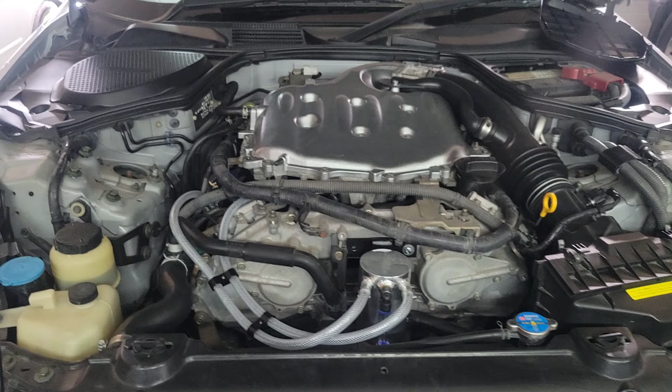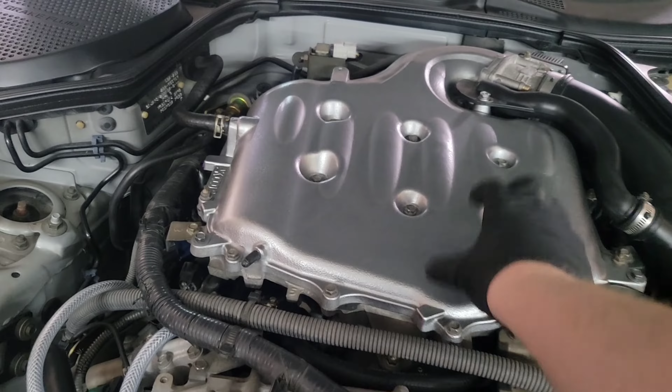All right, so I'm going to take the top manifold off and insert the GKtech spacer. What that's going to do is increase the volume here, but most importantly, it's going to allow these two front cylinders to breathe nicer by increasing the air. I'm pretty sure that's the big gain from this, because obviously there's way more volume for the rear two cylinders than the front two.

But one thing I've learned with these is that the throttle body is very finicky. So every time I work on this, hopefully it's the last time I have to take that thing off, I disconnect the negative terminal. Basically anything I have to unplug, I'll take the negative terminal off for the Nissans, because you have to do a big song and dance to calibrate that thing again. I think mine's out, but not by much.

Runs and drives perfectly fine, so I want to leave it that way at the bare minimum. All right, so I've made it this far. Be aware that at the bottom of my intake there's a hose attached to it, which I didn't know last time, and I was yanking on it, so just be careful with that. I'm just going to take the top manifold off, top plenum rather, and see how I've seen people do it.

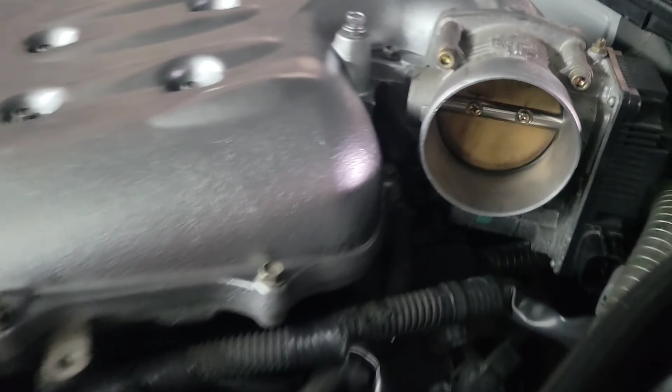The only question I have is how do you handle these coolant hoses? There's one here and then there's one on the back, and you can only really access it, from what I can tell, by taking that throttle body off. So I'm going to go ahead and try to take that off.

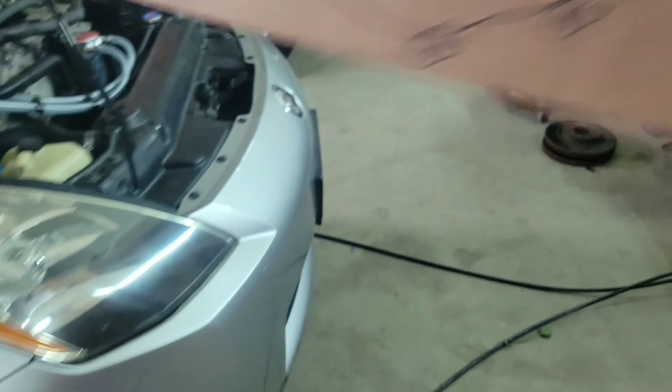My handy dandy sheet here that I made sure comes in handy, because now I know the bolts that have to come off. I'm going to start with 18 and work my way back to 1, and that's how I'm going to do it. So without further ado, let's get to it.

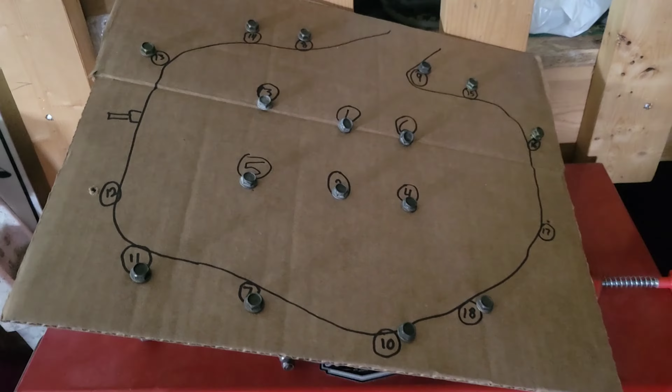There's my trusty board. Even though we're not going to be using this anymore, if you don't have a plenum spacer, even if you do, having something like this is vital to putting the bolts in the same area and the same sequence. So I do recommend that.

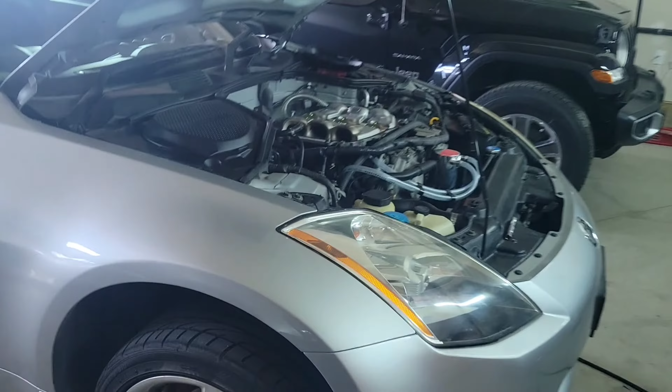I did take the top plenum off because I don't know what people do to keep that thing from flopping up and down and wrecking things. I just want to do it properly. I don't want to half-ass it. So I took it off.

Now, going back to the half-assing, I think I'm going to reuse this gasket, and it's not half-assing because I literally just replaced this. This doesn't even have 70 kilometers on it. I'm pretty sure it's the exact same material as the one they send, and this one looks mint. So I'm just going to reuse it. If I have a problem, then I'll suffer and have to do this again, but I don't think that's going to be the case.

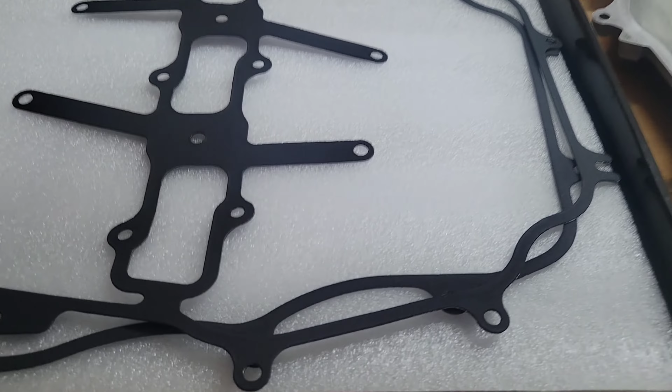They do send you the gaskets there, and like I said, I'm pretty sure it's the exact same gasket. So I'm going to run with it and just have another gasket on hand if need be.

This is the lower one, and then you've got the outer edge one beneath it. So this one does have more rubber on it, I will say that. This one is a rubber-coated steel gasket as well. From Mahle, I got that one.

So here's this, I'm going to have to make some room on here because it's all new hardware. I'm going to get to it here. You know what, I hummed and hawed about it, and I just ended up throwing the GKtech gasket on it, even though the Mahle was literally brand new. This one did appear to be a little thicker, so maybe it's to take up more clearance with the aluminum spacer, not the manifold, is what I'm getting at. So I'm just using exactly what the kit came with. No issues, it sucks, but it is what it is.

I did follow, obviously, the instructions to a T. I still have to take the studs off here.

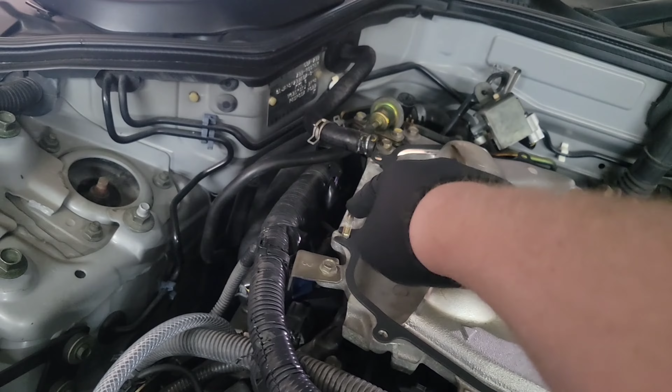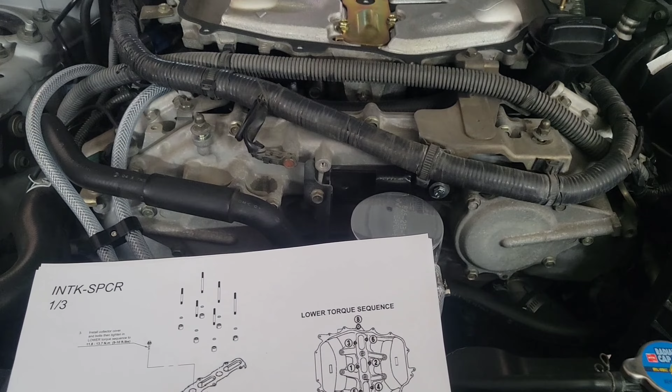It says to torque to 9 to 10 foot-pounds. I went to 9, perfectly fine. 10, I just didn't like the feel that the aluminum was giving me, so I just backed off. I left it at 9 foot-pounds. I know it's such a small difference, but these are aluminum, and the last thing I want to do is strip that bottom intake manifold. So, yeah, I did 9.

I'm going to do this step here soon. And what else was I going to tell you guys? I can't remember. But I'm sure it wasn't that important then.

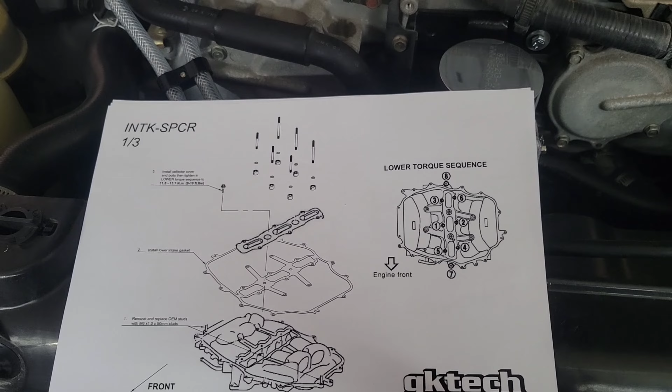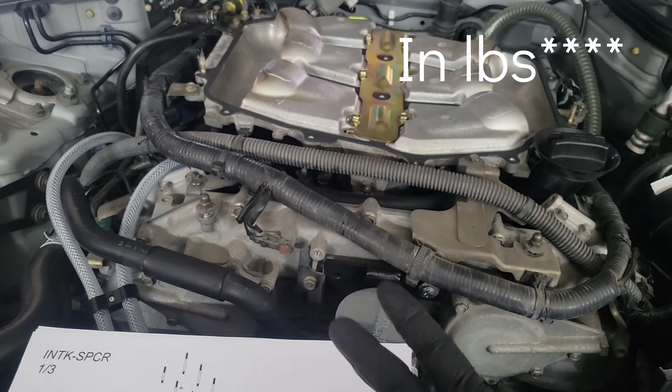Oh, when you're torquing this sequence, I personally do it in stages. That way, if all the bolts are loose and you torque this one all the way down, well, it's just physics, really. So I did it in 3 stages. I went to 60 foot-pounds, 90 foot-pounds. No, not foot-pounds. Do not do foot-pounds.

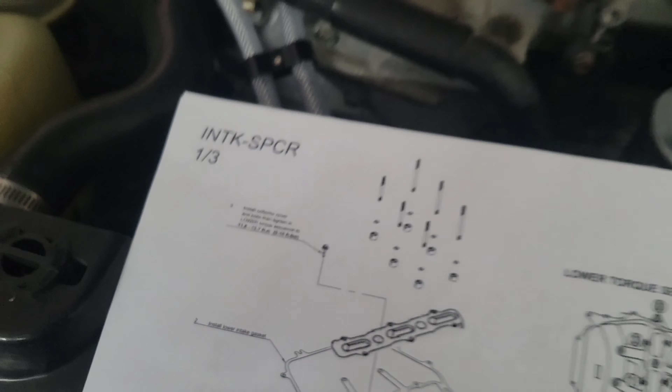I went to 60 inch-pounds, 90 inch-pounds, and then I did 110 inch-pounds, which is the 9 foot-pounds there. So I have an inch-pound torque wrench. Make sure that your units are correct when you are retorquing it.

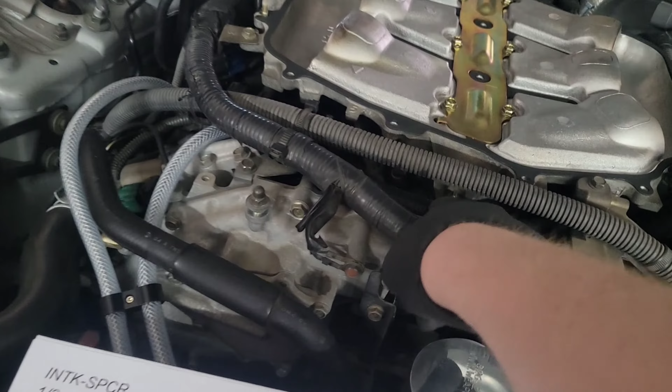Do not do foot-pounds. I have read on the forum some people take the inch-pound number and apply it to a foot-pound torque wrench, and of course they strip it right out because it's almost a wheel torque spec into aluminum. So make sure you're doing that, and I would do it in stages. That way everything tightens really nicely down, and should be good to go. So I'm going to finish this up, do this, take the studs out.

So I ran into a small hiccup. I was taking out my whole arsenal here to get the stud out. I finally got it out. I had to use 3 10mm bolts. The other one came out okay. This one was just a pain, and I did spray some penetrating oil in it.

I didn't like that idea too much because there's a gasket sitting on it that's already torqued down. But I did what I had to do, man. So finally, it snapped free, and being stuck with a destroyed stud that won't come out is a no-go for me. So I'm gonna go ahead and take this off and clean up that area and continue.

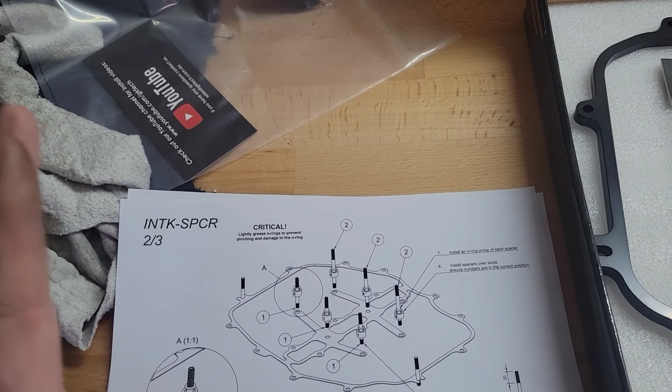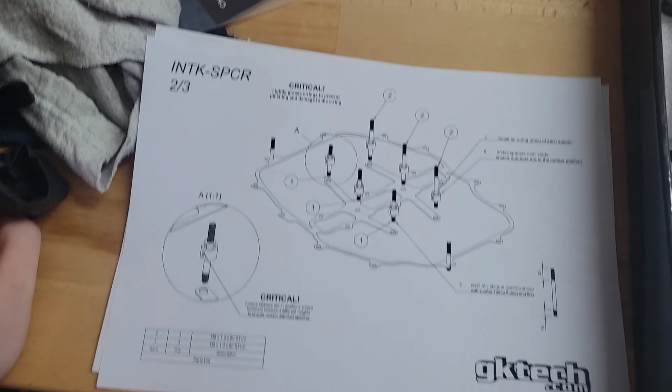All right, studs are in on the sides, lightly hand tightened, based off their YouTube video that they have for it. Onto this step here. I hate doing this because you can't really get a proper torque on it. So I'm gonna go ahead and get this done with these here and then the spacers. And apparently it is imperative how they are placed. Lightly grease the O-rings too. So I'm gonna go ahead and do that.

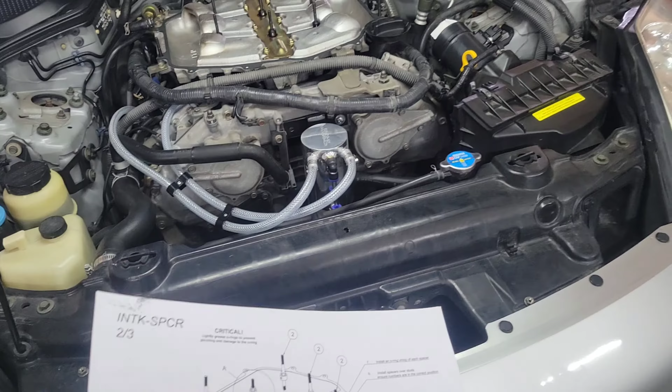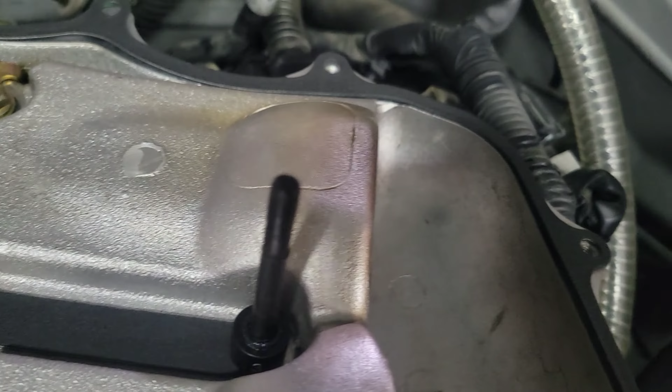All right, you guys are my star witnesses here. 1, 1, 1, 1, 2, 2. See if we can get that 3 in there. Well, it's obviously a 3. 3, 2 4s, and O-rings lightly greased. On to the next step.

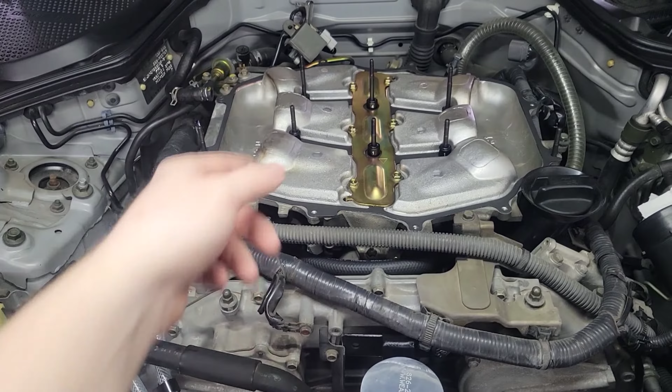Also, if you follow their video, they double nut these studs and hand tighten them further down. So I just hand tightened it until it felt comfortable for me. And they also call the spacer an onion ring, so feel free to call it an onion ring. Good name. All right, on to the next step. Put the onion ring down. That's what I did. It is also tapered, so it's equalizing the air more, so it's thicker up here and thinner at the back.

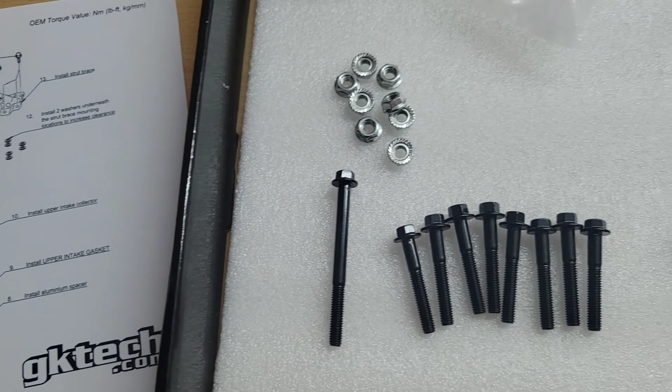I just organized the bolts how I need them here. If you can see, obviously we got our nuts, which are up here. We got 3 30mm bolts. It looks like we got 8 40mm, and then we got the 170mm for number 9 up here by the throttle body. So let me get to it.

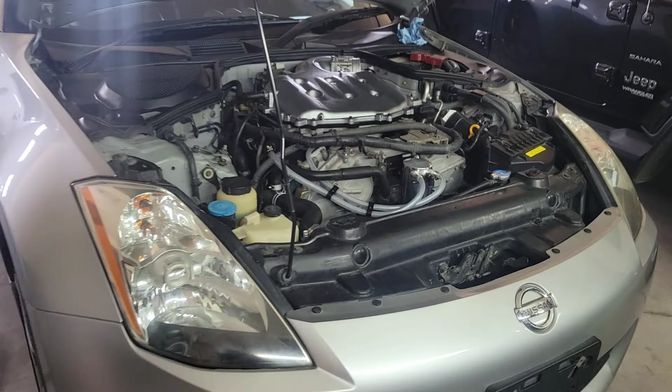All right, she's all torqued down. Man, it looks like it's higher, even in the video. It was easy except for this. I would just recommend unclipping this clip because you're stretching the factory harness.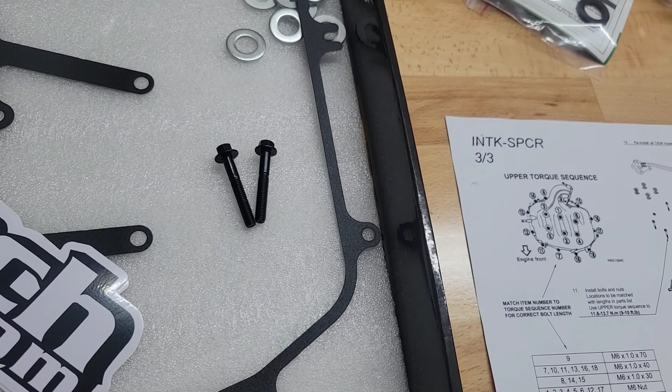If you don't, because it is higher, right? So other than that, pretty good. Just that one hiccup with the stud. You know, I have 2 of these left, and I'm double guessing and double checking my work. I had to go back into my video just to count. There was 8, and here 1 2 3 4 5 6. So, you know, it is what it is, I guess.

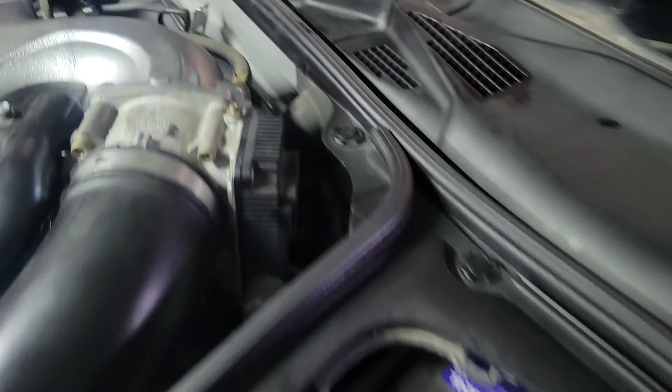But pretty good. I'm gonna button her all up and start her up, make sure everything's all good, and then take her for a little drive. All right, gonna do one final check to make sure. So I got some Z1 silicone hoses. I'm using that one back there. That's all on there, as you can see right there. Throttle body's plugged in, hose is connected, everything's good, tight.

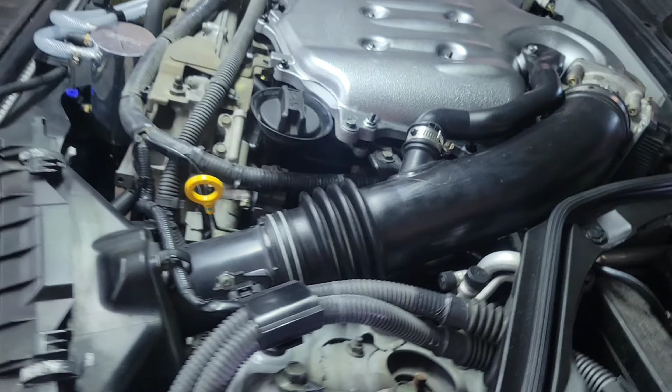Go to this side. Last time I forgot to connect the PCV hose here. So it looks like this one is not being good. I might have to fix that. But everything's good, so I'm gonna start her up and listen for leaks, if any, hopefully not.

All right, so far so good. She's revving at about 1500 RPM, which I think is normal for warm-up cycle. I don't hear anything, no hissing. So I'm gonna let her warm up, drop her down, and take her for a drive. I forgot to show you guys.

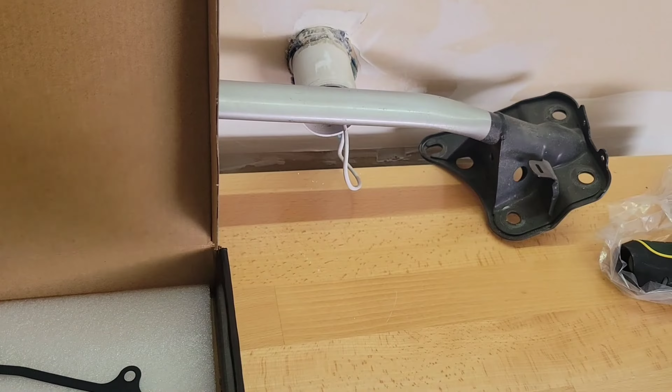Last step is reinstalling the factory strut, or whatever strut you guys have, and use those spacers there. So I'm gonna take them all out. I'm actually excited to put that thing back on. It's been a while since it's been off. So yeah, it does come with the spacers to reinstall this bad boy. So I'm gonna go ahead and do that here shortly.

All right, guys. I'm trying to make a makeshift mount for you so you can see what's going on, but it's definitely added, I'd say, across the whole power band. The engine sounds way more aggressive. It spins like all of first gear. When you want to press the pedal and you're here, I'll just show you. See if it... Told you. Can't really see much, but I'll shut it off and I'll explain to you in the garage.

Yeah, the plenum spacers definitely added, if not power and torque, which I highly doubt, massive throttle response throughout the whole rev range. My car is an automatic, as you guys are already aware, and before it would spin the tires and catch probably halfway through the RPM band, and now it spins all of first throughout the RPM band. And if you're driving down a road and you want to tap the throttle from wherever you are, it's just an instant kind of, in your seat now, whereas before you'd kind of wait and it'd go, whoa, downshift and then go. Well, now it's just like this.

So, yeah, the company GKtech, I guess it's not even an estimation, they dynoed it. 10 wheel to 14 wheel horsepower gain, and I can't remember the torque. The torque is around the same. So 300 bucks is what I paid, Canadian, I think after shipping and duties and everything. It's a very good bang for buck modification, and not only that, but the front two cylinders are getting the proper airflow, so it's all around good. So yeah, highly recommend it. The one that I went with is GKtech. Heard nothing but good things, and they specialize in Nissan Zs, I think, like the whole spectrum.